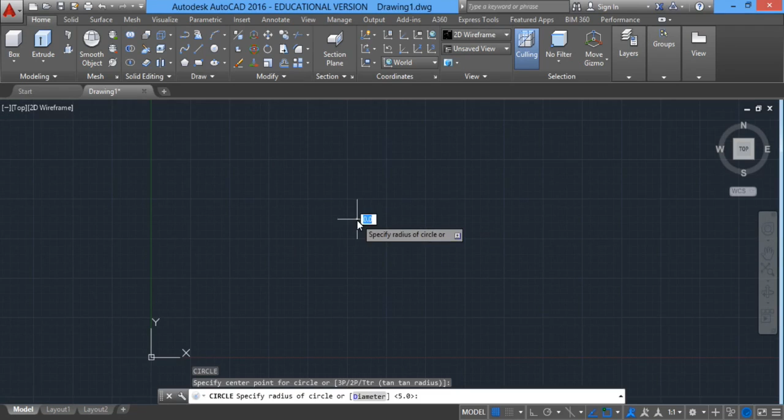Use polyline to draw a blade. Draw it according to your convenience.

3D curved objects are designed with the intersection command. Watch till the end of the video to clear your doubts.

Adjust the points to get a better figure.

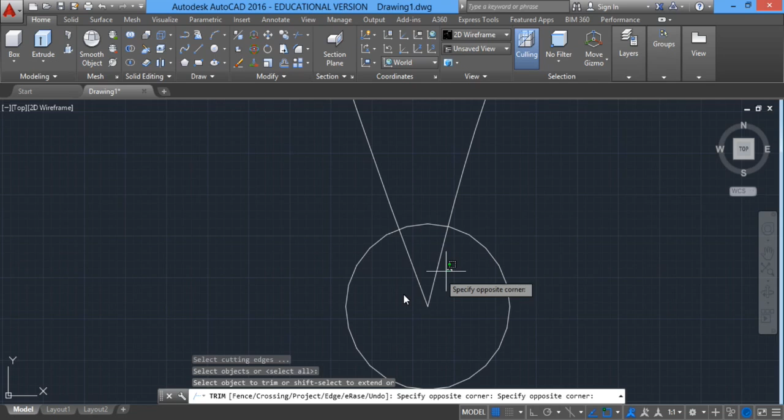Trim all the extra lines. Use the boundary command to get a boundary of the region.

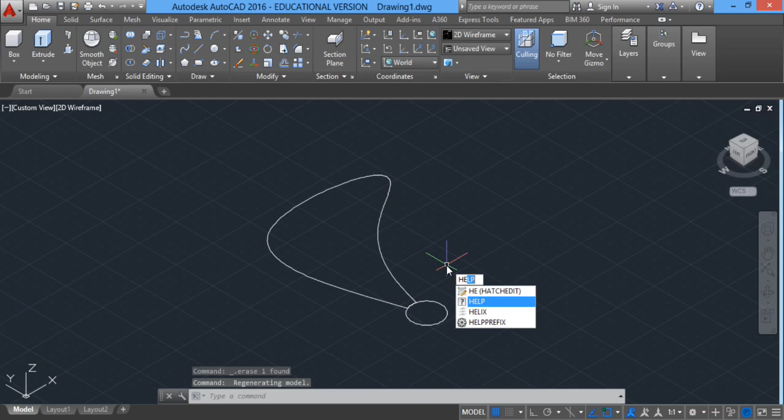Use the helix command to draw a spiral of a suitable height and turn. Note the dimensions used.

Draw a small rectangle and sweep it over the spiral.

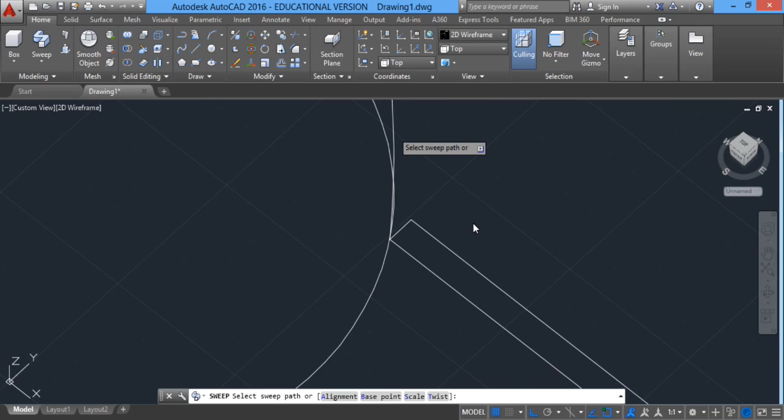Extrude the blade over it.

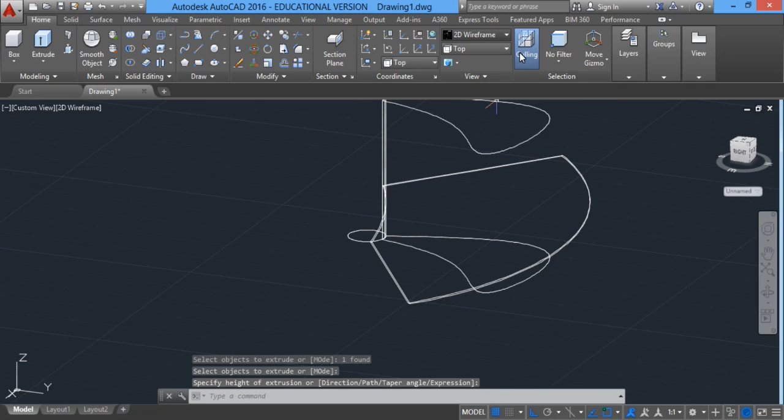Use the intersect command to get the intersection part.

Extrude the circle to a height of 15 mm.

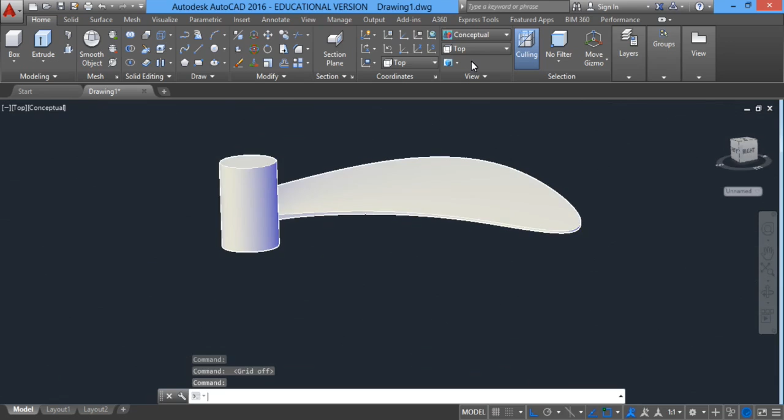Use the array command to draw more blades accurately.

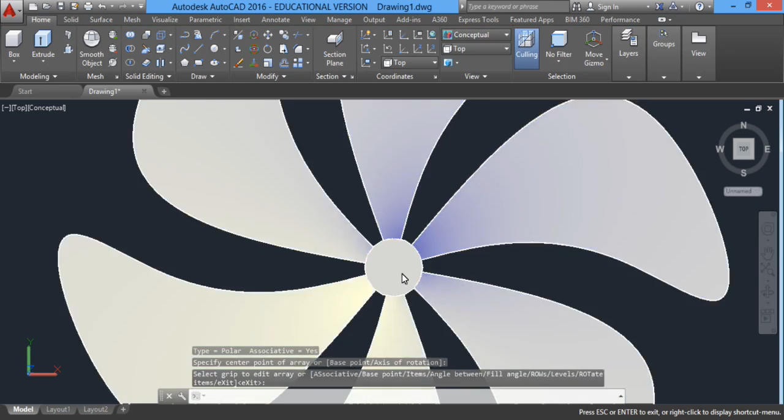Use the fillet command with a radius of 5 mm to get a curved end.